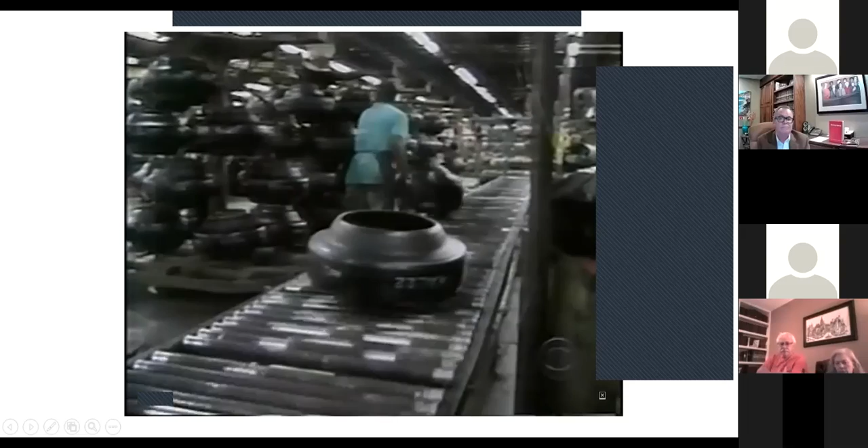Finally, only on the CBS Evening News with Dan Rather. Japan's Bridgestone company announced today it will shut down the Illinois factory that made many of the millions of Firestone tires recalled over the past year. The Decatur plant employs 1,500 people, producing about 10% of the Bridgestone and Firestone tires made in North America. It is to be closed by the end of the year.

In Decatur, it was splashed across the front page of the newspaper, and there were multiple pages of the newspaper dedicated to the Decatur Firestone Plant and its closing. The Herald and Review had devoted a substantial portion of the newspaper years prior, on February 14th, 1988, to celebrate the 25th anniversary of the Firestone Plant, and the plant had an open house for the community that day. The existence of the Decatur Firestone Plant was part of the historical fiber of our town.

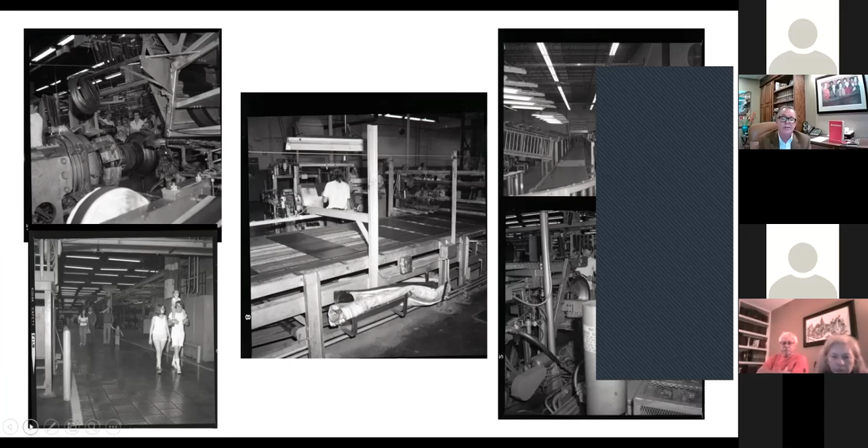Let's turn the clock back even further to 1962. The plant out on 22nd Street had been used to build tank engines during World War II, and at the end of the war, the plant became the Signal Depot. The Signal Depot was operated here from 1946 until 1960. It was an electronic distribution center. There were some offers made when the government put the factory up for sale, and then Firestone came forth with a bid for $2.5 million.

And the Firestone company bought the plant. Local attorney Tom Armstrong represented Firestone in the purchase. At first, Firestone was unclear whether it would be a storage facility or a tire manufacturing plant. An interesting thing about Firestone coming to Decatur is that the Firestone family had been here on June 25th, 1921, for the wedding of Decatur native Elizabeth Park and Harvey S. Firestone Jr., the son of the founder of Firestone.

The ceremony was at St. John's Episcopal Church here in Decatur, followed by a reception of 225 guests at the Country Club of Decatur. The newlyweds took a honeymoon to Canada, which was topped off with a week at a resort just outside of Washington, D.C., compliments of President Warren G. Harding, and they were joined by the Henry Fords and the Thomas Edisons.

Harvey S. Firestone Jr. became the CEO and the president of the company in 1948, and he made periodic visits to Decatur, even before we had a plant, including being the keynote speaker for the United Fund Drive in 1958.

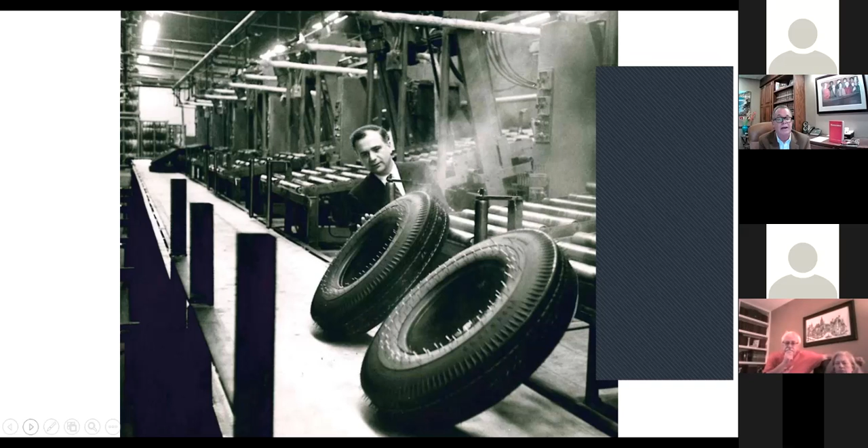In May 1964, the Decatur Firestone plant was dedicated with a 3-day ceremony. The Firestone family and chief executives were in attendance, as was Illinois Governor Otto Kerner. Production was already up to 12,000 tires a day, and Governor Kerner declared May 12th Firestone Day in the entire state of Illinois. 18,000 people from Decatur toured the plant during those 3 days.

In the Firestone annual report released in 1966, it was announced that the company's profits had increased over 17% and sales had increased over 13%. And Firestone tires had been on the winning car in the Indy 500 race for 43 consecutive years.

Our Firestone plant was a community within a community. The Firestone workers in Decatur had golf league teams, softball league teams. They helped sponsor the Firestone JFL field. They held picnics and events. They celebrated birthdays and anniversaries right there in the plant. They even had a bathtub boat race across Lake Decatur. And they treated fellow plant workers like an extended family.

I want to skip ahead now to February of 1988, the 25th anniversary of the plant. At that point, there were 1,500 hourly employees at the plant and over 300 salary employees. And they were turning out over 25,000 tires a day.

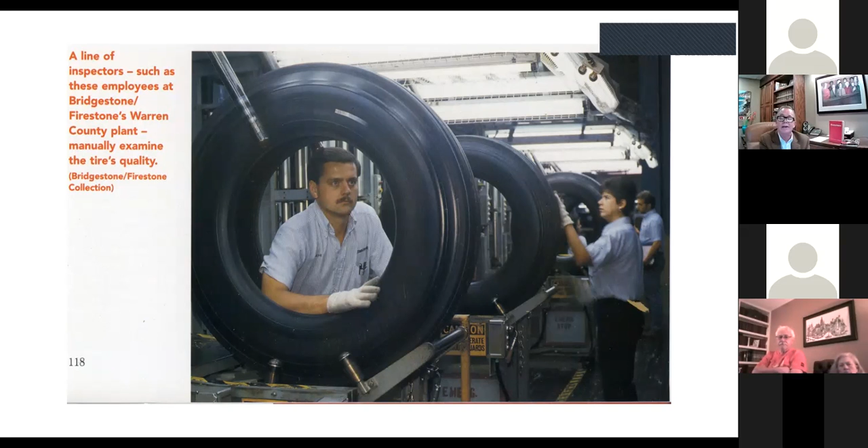On the local level, the United Rubber Workers Union went out on strike on May the 15th, 1988, 2 months to the day of the Bridgestone buyout offer. Think of this now: on one hand, you have the company trying to contract the benefits, and on the other side, they've just paid $2.6 billion for the company.

Let me stop again and point something out about how pivotal 1988 was for Firestone locally. The plant had existed for almost 26 years at that point, and it would remain open under Bridgestone for almost another 13 years. So under the first two-thirds of the life of the Firestone plant, it was operated under the Firestone umbrella, and for the last third, under Bridgestone Firestone.

If you look at the articles about the Firestone plant run in the local newspaper, the overwhelming stories for the first 26 years were relatively upbeat and positive. And for the last 13 years, the tone of the overwhelming majority of the articles would not be what I'd call upbeat. This influenced the average opinion and impression of what was going on with the Firestone plant. And I believe it was unfairly done so.

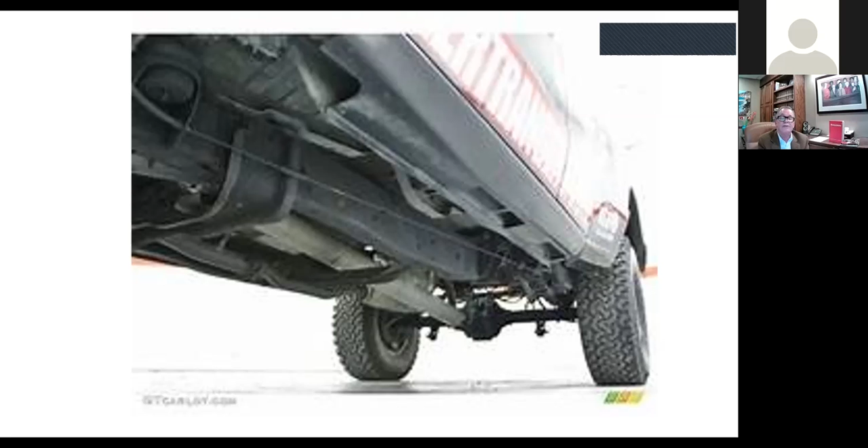Meanwhile, Ford had created a design by taking an SUV cabin and attaching it to a Ford Ranger undercarriage, a cost savings because they were not creating a new undercarriage. However, the added upper cabin weight created a higher center of gravity and was more likely to roll over.

After the Explorer rolled over in company tests, even prior to production, Ford engineers decided to lower the suspension and reduce the air pressure in the tires. A consequence of lowering the air pressure was increased higher temperatures, which could lead or contribute to tire failure.

Most of the tire failures were on the left rear side, closest to the exhaust, which was hotter than the other three tires. It should be noted that more tire failures occurred in hot weather climates like Florida, Texas, Arizona, and California.

The Firestone and Ford Explorer tire controversy was linked to 271 fatalities and over 800 injuries in the United States. The problem was one of tread separation of the ATX, the ATX2, and the Wilderness AT Firestone tires, which were installed on the Ford Explorer and other similar vehicles.

In March of 2000, the National Highway Traffic Safety Administration began a preliminary inquiry, which became a full-blown investigation on May the 2nd, 2000. On August the 9th, 2000, Firestone issued a recall of 6.5 million tires. Ford voluntarily recalled 13 million Firestone tires on May the 21st of 2001.

Those of us in Decatur read so much about labor unrest in the 90s, and there had been wide speculation that the Firestone tire problems might be connected to the labor unrest.

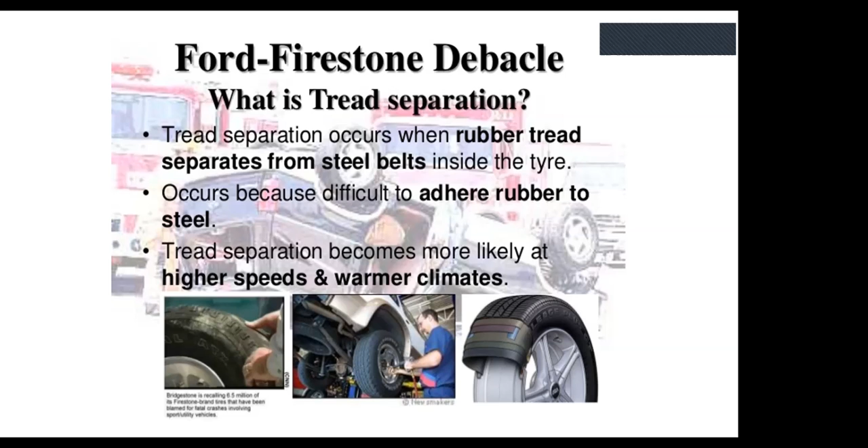Thirdly, tire design. The belt wedge gauge for the ATX and the Wilderness AT tires was less than for comparable tires of other tire manufacturers. The wedge gauge was less than Firestone's own standards, and a lesser belt wedge is a design factor in the bonding of the tread to the tire carcass. Adhesion tests showed that the Wilderness AT tires were weaker than a similar tire made by other companies. So you had a design problem.

Fourthly, circumstances unique to a particular plant. This is the least scientific potential cause for the tire failures. There is absolutely never any evidence of any intentional effort to damage tires. There was some question about the use of substandard materials, such as products that were not properly stored and maintained.

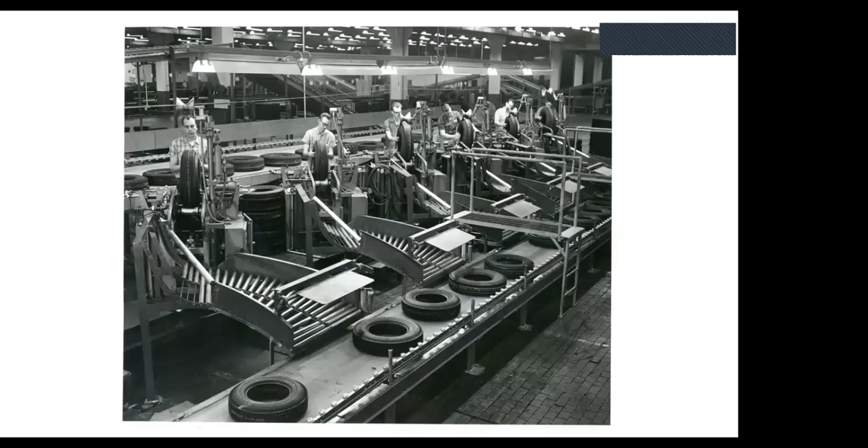And fifth, decisions made on the corporate levels of Bridgestone and Firestone, which I will get to. This brings us to the plant shutdown in December 2001 and the question of why the company shut down the Decatur plant. Bridgestone announced that the cause was the aging of the plant and the decline in market demand.

Was that so? The Decatur Firestone plant was a large manufacturing series of buildings. Regular maintenance was done. The equipment and machinery went through 2 separate modernizations during the life of the plant, and the machinery was not outdated. In fact, it was again used in other plants.

The workforce at Decatur was never documented to be less capable. In fact, the workforce of 2001 was highly experienced and skilled. So what else entered into the decision to shut down the Decatur Firestone plant?

Well, we go back to 1988 and the buyout by Bridgestone, the burden of paying the $2 billion of debt by the company. And here's what we know at the time the Firestone plant was closed down. The litigation over the Ford Explorer rollovers and the congressional investigation led by Senator John McCain resulted in massive discovery efforts to discover what was going on at the corporate level, and here is what they found.

In 1995, in an attempt to reduce the massive debt — and remember 1995 is a key year here with their tire problems — Bridgestone authorized the U.S. operations to secretly implement an unprecedented tire manufacturing cost reduction program called C95. The program resulted in a reduction of the production costs of Firestone tires by 26% over 4 years.

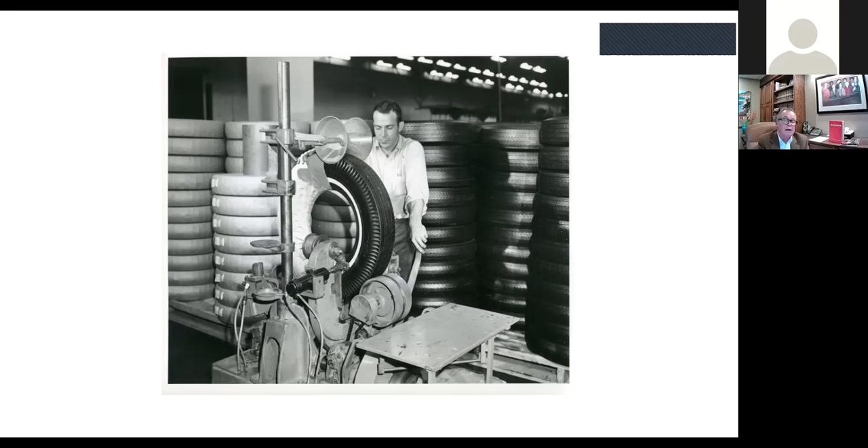Putting the entire picture together, Decatur lost the Firestone plant in 2001, not as a result of union unrest, and not as a result of faulty work at the plant, but rather because of design flaws by Firestone and Ford on their corporate levels, and by the flawed economic planning by the Bridgestone company in buying out the Firestone company and then taking steps for purely economic reasons, which resulted in a less quality product.

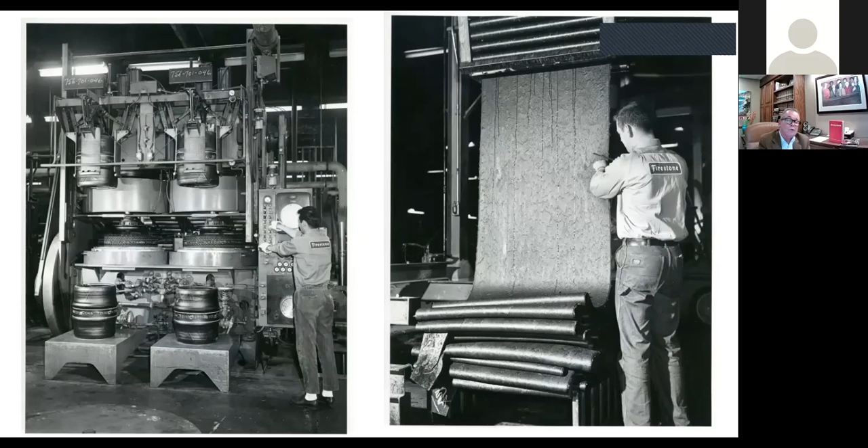In summation, the Decatur Firestone plant was a huge asset of our community for almost 39 years. The people who worked at the plant were among our friends and our neighbors. The closing down of the plant was as a result of bad decision-making on the corporate level outside of Decatur. But the memory of the Firestone plant will remain a large part of the historical fabric of Decatur.